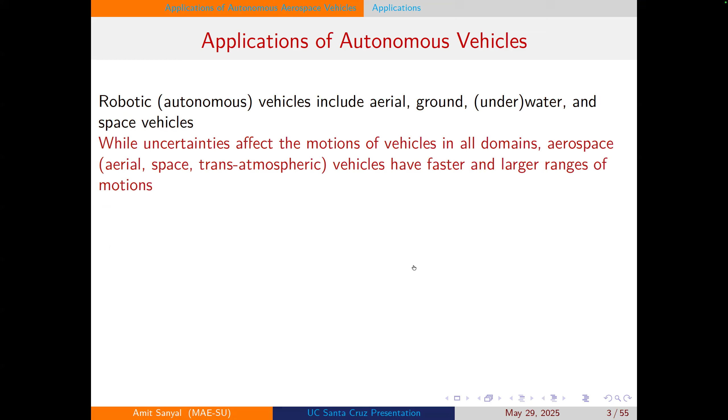So in terms of the applications, we know that robotic or autonomous vehicles include aerial, ground, water and underwater, surface water and underwater, and space vehicles. And model-based control has been around for a long time, and they work very well in many cases.

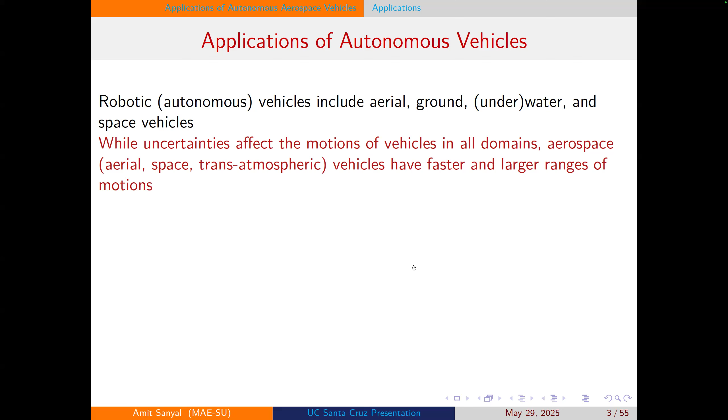But over the last decade, at least, we know that uncertainties, as our systems have become more complex and we are looking at different real-world situations and uncertainties in all domains, we have vehicles that are faster, larger ranges of motion. So we need to be cognizant of all these uncertainties and then come up with control and estimation, motion control estimation schemes that are robust to these uncertainties.

So applications, of course, we have several domains and several application domains, meaning aerial vehicles, space vehicles, trans-atmospheric vehicles, although I'm not going to talk much about the third category. And there are wide-ranging applications like exploration, transportation, infrastructure inspection, remote sensing, security, etc.

So there are, of course, increasing requirements for autonomy in these applications. And actually, I just mentioned these applications. There are more details that I have been working on. For example, on the exploration aspect that I'll mention, on remote sensing, for example, for natural disasters like wildland fires, which I'm involved in current projects in.

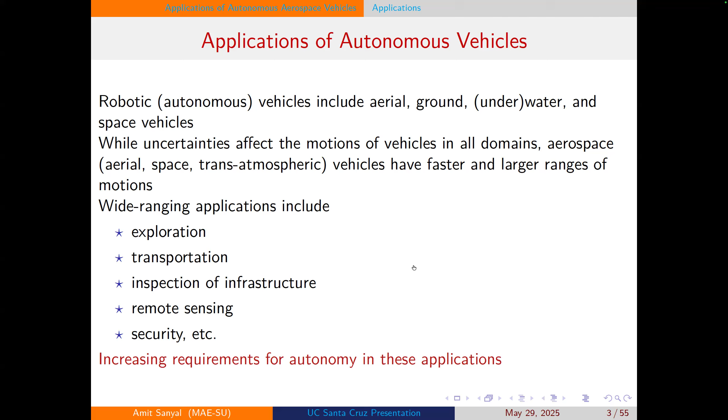So these are things that there are different sorts of uncertainties, and we require safe autonomous operations in these situations. So this is just to mention that these include search, rescue, and transportation. And then you have grand challenges, which are like exploration, engineering tools of scientific discovery, urban infrastructure, security aspects where autonomous vehicles can be a game-changing technology.

And of course, we have had these for some time, but with the recent advent of different kinds of machine learning or deep reinforcement learning schemes, etc., which I don't really get into much. I have had tangential use of those and experience with those, but I stick to the more fundamental, system-theoretic aspects of stability and robustness in whatever schemes that I describe here and in my research in general.

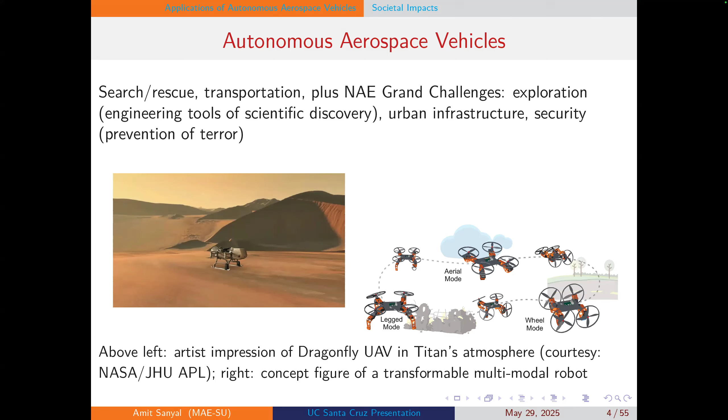Coming to the technical challenges for aerospace vehicles, we have guidance, navigation, and control. That's how aerospace engineers refer to the process of path planning, the process of motion estimation and mapping, and then the process of feedback control.

These aspects, in particular the navigation and control aspects, need to be really stable and robust to uncertainties. And of course, the last two are usually done in real time. Even guidance can be done in real time, sometimes it is not, but in all cases you're operating the vehicle in real time. So real time uncertainty estimation, control, robustness, and stability properties are very important.

Now, the challenges that I've listed here are uncertainties in the dynamics, sensor noise, and constraints. These include onboard power, processor, and sensor constraints, which affect control and navigation in the first two bullet points listed here, and then under-actuation and actuator constraints, which affect the guidance and control aspects.

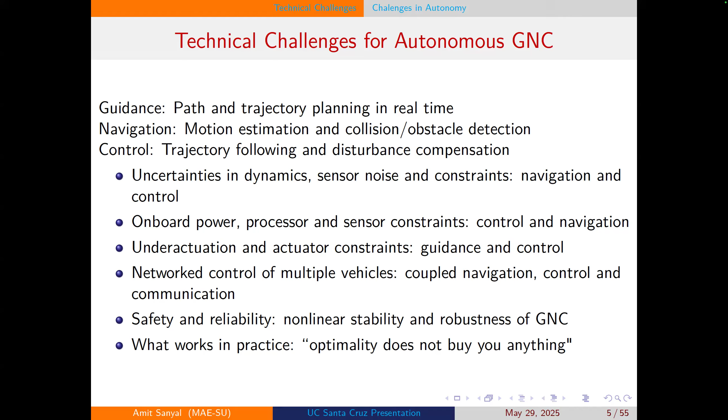So in aerospace vehicles, the first thing that I teach my graduate students, postdocs, and those who work with me is that the dynamics evolves on a nonlinear state space, in particular a manifold. That's where geometric mechanics comes in, and related to that, geometric estimation and control schemes.

You have 6 degrees of freedom for a rigid body vehicle, and you might have internal or shape degrees of freedom as well, which would be additional. So there are 3 degrees for translational motion, 3 DOF for rotational or attitude motion, and then internal or shape DOF due to actuators and power.

This includes power units that are moving as well, attached to your vehicle, like electrodynamic tethering or tethers that also generate power in spacecraft by interaction with the geomagnetic field. Flexible structures also contribute to internal degrees of freedom, and these motions are assumed to be uncoupled or only weakly coupled in a lot of control schemes.

So that's how I have displayed this in these blocks. You have an attitude dynamics model, attitude state estimation, and then feedback control, with limited or no coupling with the translational dynamics, and then the translational state estimation and control of translational maneuvers.

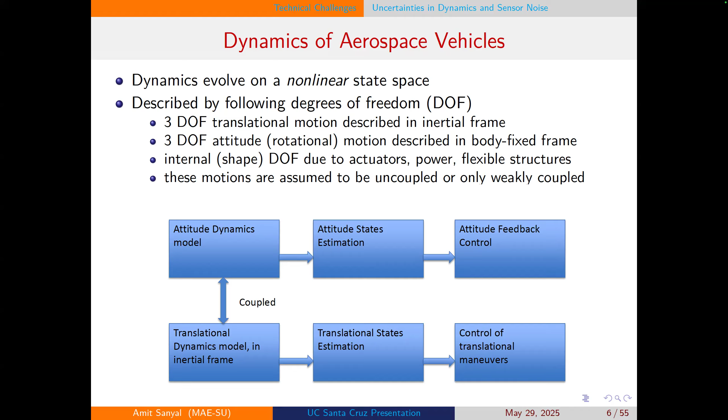So the coupling does exist due to gravity, non-conservative effects, control forces and torques from body-fixed actuators, and internal degrees of freedom. Internal degrees of freedom is what I don't talk about much here. Interestingly, that's what I worked on primarily, using internal degrees of freedom, during my PhD research a long time back.

That is actually even more complicated in terms of the dynamics. After that, I found that people are still finding it difficult to deal with rigid body vehicles and multiple rigid body vehicles, so that's what I mainly focus on now. But internal degrees of freedom do play an important role in coupling attitude and translational dynamics, and that could be even flexible due to flexibility of the structure.

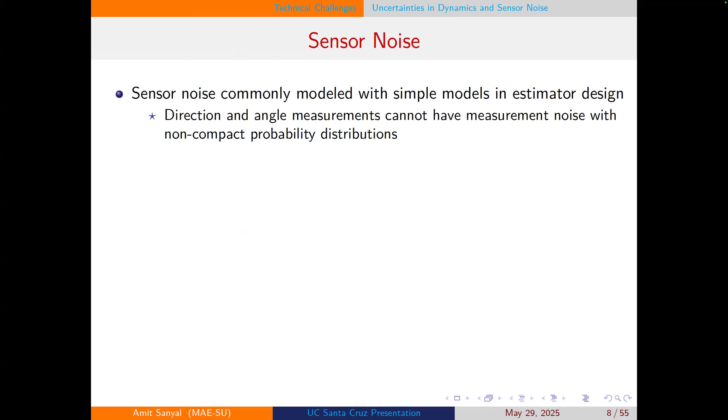Sorry, I think I went forward too quickly. So the effects of coupling due to these different influences are often not known precisely. And if you assume that it's uncoupled, then it'll not be robust to these effects.

In some cases, when the energy in the translational motion is much larger than rotational energy, the uncoupled approach works one way, in the sense that the translational motion affects the attitude motion, but not the other way, because the translational motion has so much more energy than rotational motion.

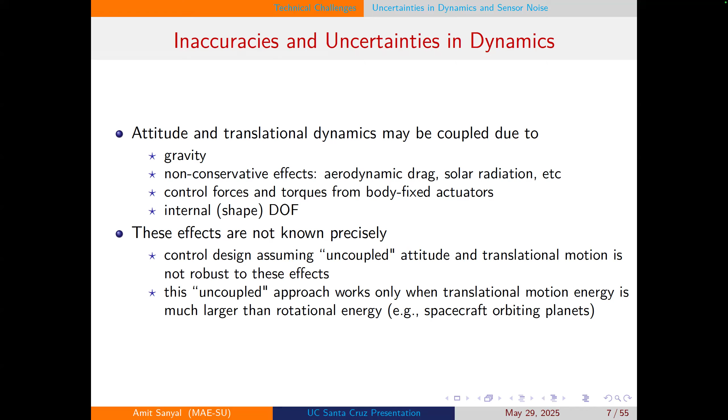So talking about sensor noise, that's another thing where we usually use simple models in estimator design. You can create an optimal, quote unquote, estimation scheme based on these simple models, like extended Kalman filter, for example.

However, that's not going to be robust, and the EKF is known to be even unstable, or it lacks guaranteed stability, let's put it that way. So you are not guaranteed that you'll have stable convergence.

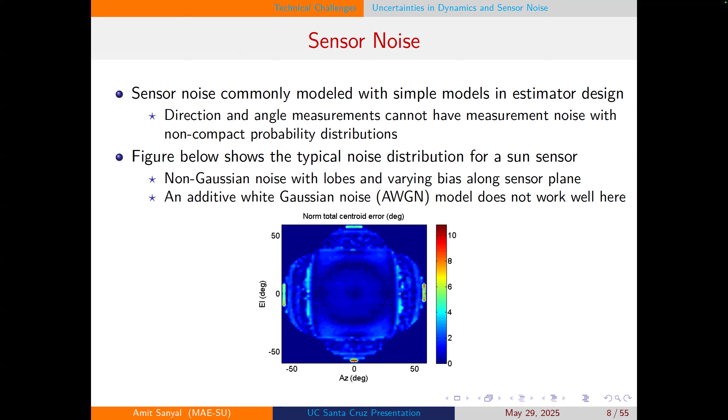So in my research, I have primarily used deterministic methods because they're more robust, and I don't care about optimality, as I mentioned earlier. Deterministic works very well. What works in practice is, and I tell my students this, that it's good theory that leads to good practice. So what works in practice, why change it?

And of course, we have constraints on power, onboard processors and sensors, although these are becoming better and better year to year. We can see that some of these sensors nowadays have inbuilt schemes based on CNNs that can detect obstacles in real time and move out of the way.

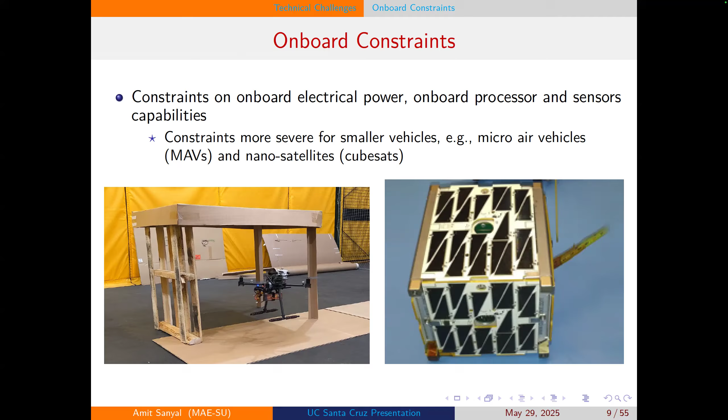That's actually the perception problem, which I think is where computer vision has made a lot of progress, but I'm not going to really focus on that. It's something that I have used and continue to use, and there are some useful aspects, although I don't rely on it entirely in the feedback loop, because there are problems with those perception schemes.

So in terms of underactuation, I'll just go over this quickly. As I mentioned before, for most aerospace vehicles you actually have body-fixed sensors or actuators, and these can give you three degrees of control of the rotational motion, but usually just one translational degree of freedom is directly controlled. So that is underactuated, but it's known that we can go from point A to point B. Path planning is possible with that kind of actuation.

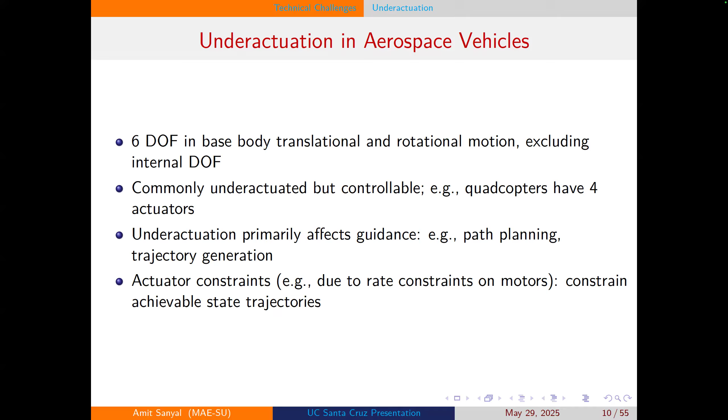More importantly, there are actuator constraints that can restrict achievable state trajectories. These are things that, if you factor in during the design, are better than trying to redesign or change your design on the fly after you have designed a control or estimation scheme.

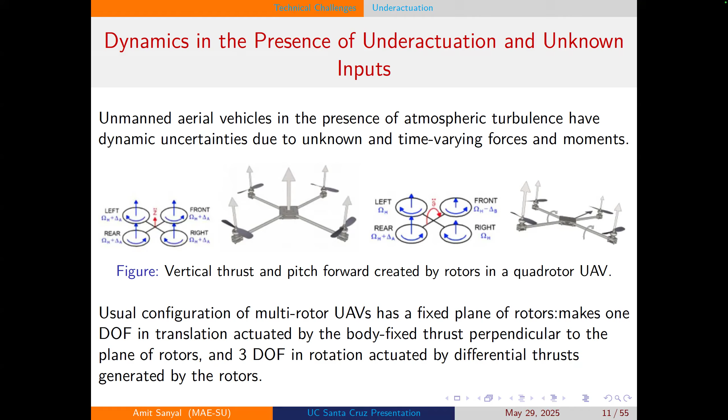So I'm depicting quadrotor UAVs here, rotorcraft unmanned aerial vehicles. Here I talk about dynamic uncertainties due to external environmental conditions like atmospheric turbulence. In this case, we have actually found that active disturbance rejection control, using some of our geometric control schemes and estimation schemes, works very well. I'll talk about that later.

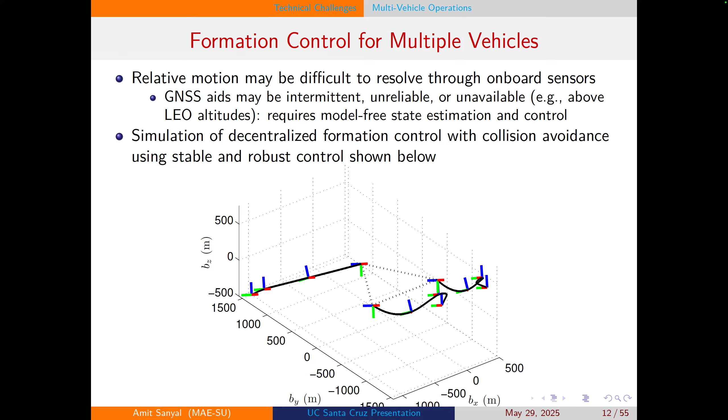So these are the initial configurations, relative configurations, and then they come around to form a triangle formation, as shown here. I don't go into the details of the schemes, but that's something that we have done in the past.

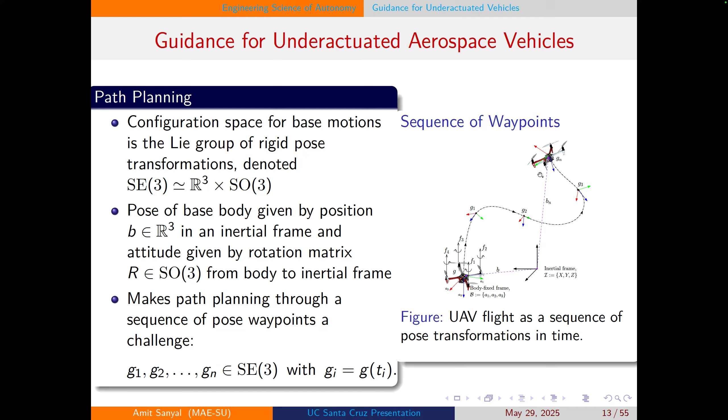So getting into the path planning problem, this is a situation where we have guidance for a vehicle like a quadrotor UAV with a fixed thrust direction, and we have 3 rotational degrees of freedom controlled directly with the 4 thrusters. You can generate a sequence of waypoints as shown here in an inertial frame. I denote these waypoints by G1, G2, G3, to denote that they encapsulate both the position of the base body and the orientation. So G is basically the pose, taking into account both position and orientation. We specify some waypoints in pose, and then we have a motion planning scheme to execute that.

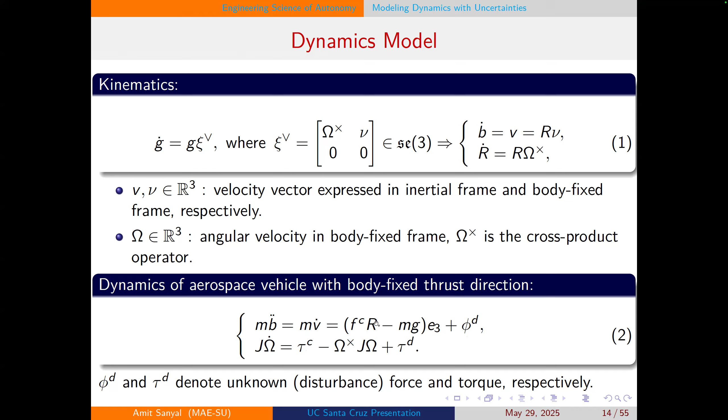And with this, we can actually generate a trajectory given some waypoints. This was part of a project we did 7 or 8 years ago, maybe 2018 to 2020. It ended around 2020, just around the time COVID hit. This was an interesting situation - we actually did not fly it outdoors.

The waypoints were designed using a reinforcement learning scheme, but it was outside the loop, because it took a lot of time to do that - I would definitely not put it inside the loop. Once the position waypoints were generated, we then generated a position trajectory using nothing but LQR, and the LQR model was basically a fourth order integrator model.

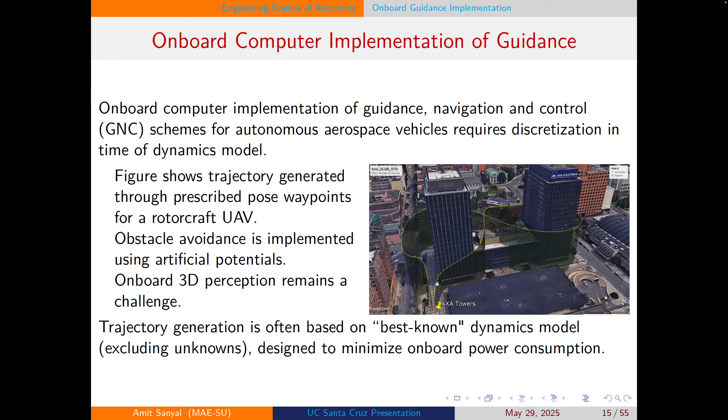We then generate the trajectory. It's based on a best known dynamics model, but the control scheme takes care of disturbance rejection. So we have trajectory generation, then motion estimation, and then the feedback control scheme - that completes the entire loop.

The trajectory planning, as we found, can be done onboard, and we use learning algorithms to generate 3D waypoints and trajectories. But for real-time onboard implementation, we put that outside the loop, and then use sensors to go through those generated waypoints using GPS for outdoor flight.

We didn't actually test it in that area, and at that time we were warned by the police, so we settled on an area where we got permission to do this in a field, generating this trajectory and waypoints. This was done, and we also later did this in simulation, not in the actual outdoor flight. In simulation, we also added a pointing direction constraint, and that was interesting.

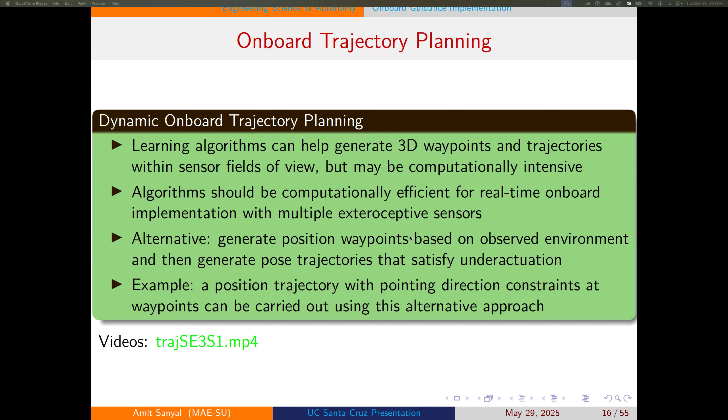Let's see if this works. If I have time, I'll share this trajectory generation - I think I have more videos, but I may not have time to go over those.

So this is the situation where this goes through those waypoints, and you'll see that the red line, or red axis, aligns with the direction that we want it to point.

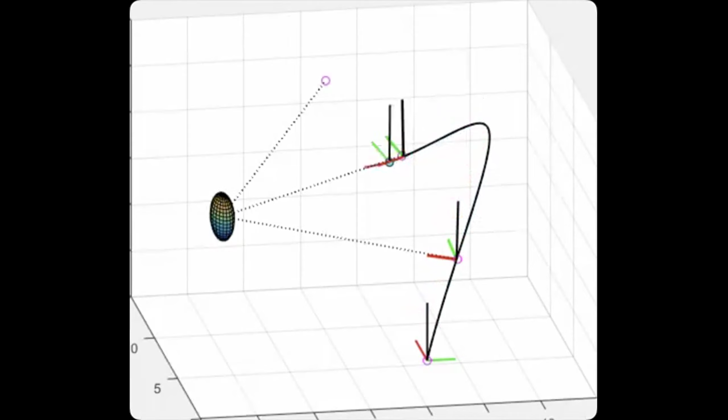And curiously, it makes these S-shaped curves. That's actually the position trajectory generated by the LQR. And it ends at each location, you'll see that the pointing direction is satisfied.

So going back to my presentation, so this, okay, now I'm going to switch gears and talk about motion estimation.

For motion estimation, for attitude estimation, it turned out to be quite easy and very easily implementable in hardware. Translating from theory to practice was easy. We came up with this interesting relation between what is known as Wahba's problem in attitude determination, which has been around since the space age started.

And then we generalized it to a Lagrangian, using an artificial kinetic energy-like term and artificial potential energy term. We found that Wahba's problem, the minimizing of this residual, actually leads to a Morse function, a polar Morse function.

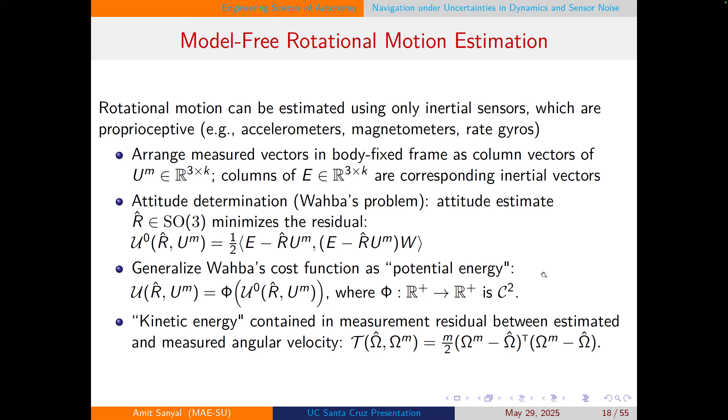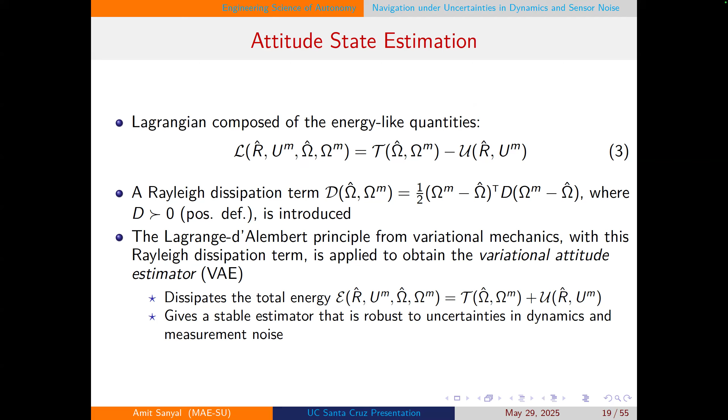And then we have a Lagrangian composed of that. If we introduce an additional Rayleigh dissipation term and apply the Lagrange D'Alembert principle, then we end up getting what I call the variational attitude estimation scheme. This is going to give you a stable estimation scheme that is robust to uncertainties in the dynamics and measurement noise, because it's actually model independent. So it's a data-driven estimation scheme - it does not depend on the model because you do not know what the dynamics model is, or what the inertia parameters are, like the mass of the body, etc.

So this can be discretized using the discrete Lagrange D'Alembert principle. This is discrete geometric mechanics. I won't go into the details again, just giving a very high level description here.

And we compared this with, at that time, some schemes that are still kind of used. This is a filtering scheme from 2013 called the GAME filter, geometric approximate minimum energy. This is like a second order scheme - the extended Kalman filter is first order, so this is kind of a second order Kalman filter. It's based on work done in the 1960s by a person at UCLA, trying to get higher order optimal estimation schemes for nonlinear systems by generalizing the Kalman filtering formulation. Then we compared it with the MEKF, the multiplicative extended Kalman filter, and this constant gain observer.

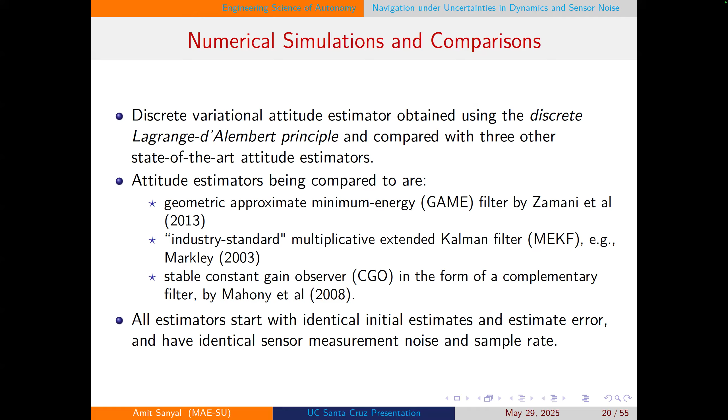All estimators we simulated, and then we also implemented on a smartphone. All estimators start with identical initial estimates, estimation error, identical sensor measurement noise, and sample rate. This was interesting - it was actually reported in ICRA in 2015.

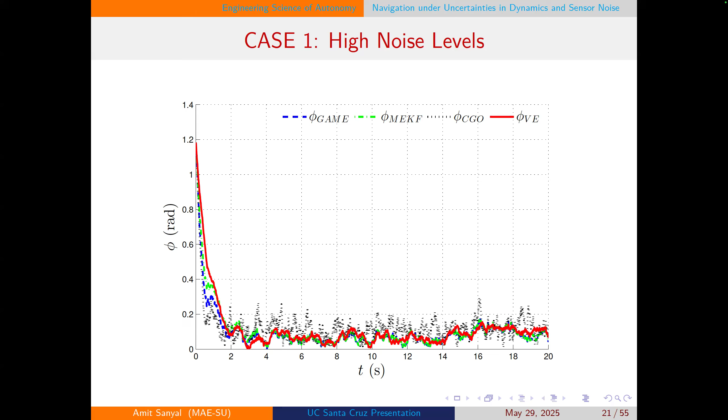However, if I do not change the filter gains, and now I have a better sensor, my noise levels are now less. What happens is interesting.

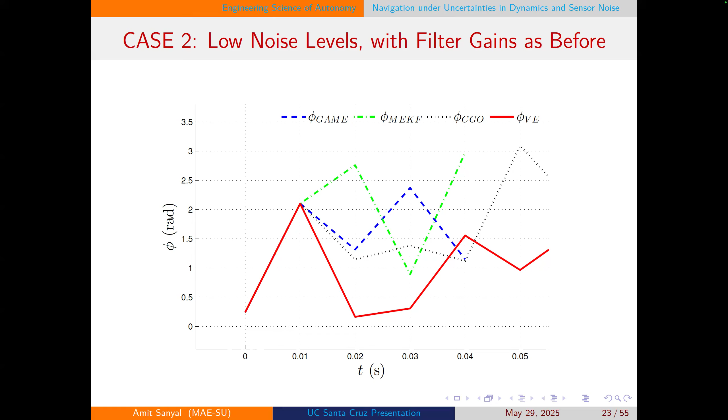So that's expected. It was kind of counterintuitive at first, but then we realized that actually if the sensor is better than what was thought when you designed it, and that's where optimality, as I say, is only with respect to whatever index and whatever assumptions you made. So if those assumptions are wrong, then you can have unstable behavior.

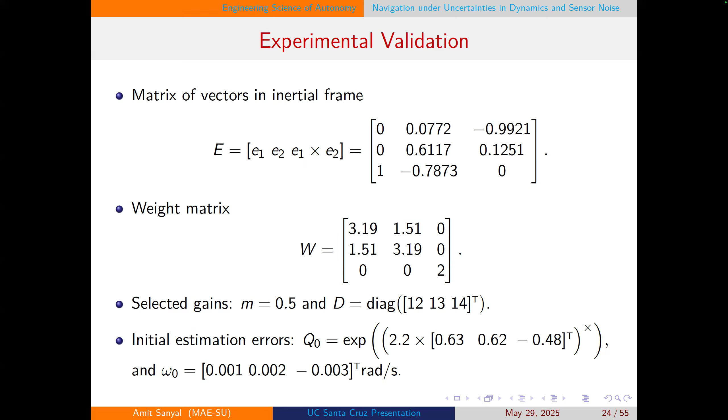So near optimality is what you get with these kinds of filters, and near optimal does not guarantee stability. Experimentally, we validated this also using, at that time, 2014, I don't know if this is going to work or not, but this was actually...

So in summary, it worked out without needing to be retuned. Every time you change sensor does not mean that you need to retune. It'll throw the estimation scheme off a little. It'll have transients, as we saw, but it's still going to converge.

And then we extended this. We made a finite time stable version of this, which was continuous, uniformly continuous. We use Holder continuous finite time stable schemes, which are actually implementable, and they're uniformly continuous. They're not like sliding mode type observers or control schemes.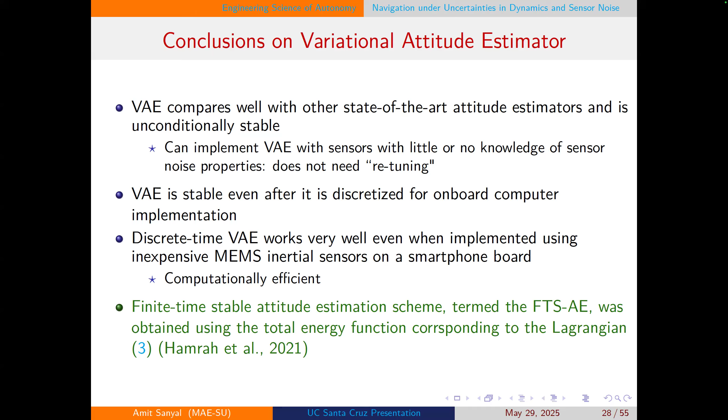It works out very well. We found that in 2014, 2015. However, pose estimation is a whole different ballgame, and we are only now realizing it. Our pose estimation schemes—I'm just going to go over this fast in the time given, so I know that I'm behind—this is actually using the same sort of idea.

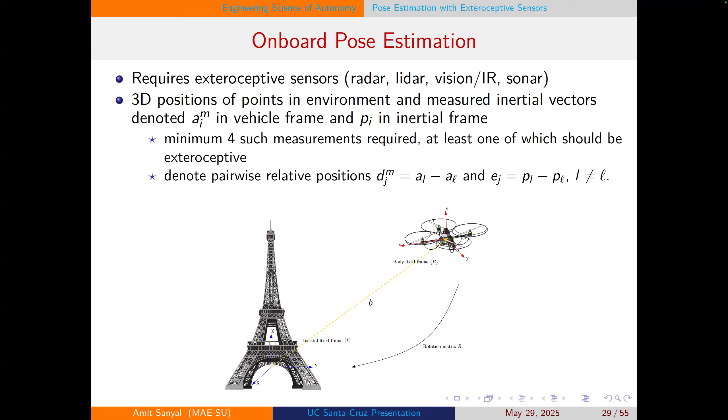Here now for pose estimation, you have point clouds. These could be from LiDAR or depth cameras. It could even come from sonar or radar. But point clouds are then used to find centroids for the point clouds.

And then assuming that you have perfect measurements, this is how the centroid of the point cloud that you have in the inertial frame and the point cloud that you measure in the sensor frame are related. R is the rotation, B is the translation of the sensor with respect to an inertial frame.

So at least one 3D point needs to be measured to estimate the position, and you need 3 others to estimate the orientation, but those could be direction measurements. So for measurements, we can have some linear filtering to remove noise from the sensor frame. And then we relate the vehicle translational and rotational velocities to these measurements without actually directly measuring them.

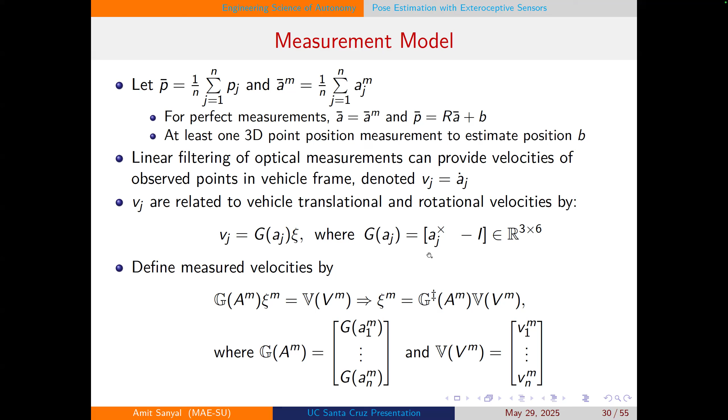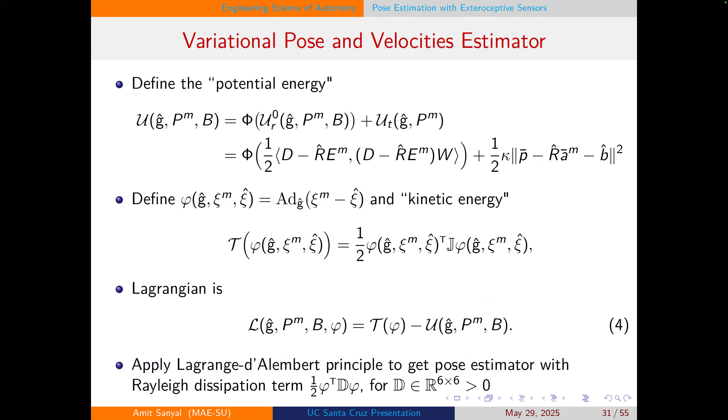And this was interesting. So again, we create the potential energy and kinetic energy, a Lagrangian from that. We apply the Lagrange-D'Alembert principle, and we get numerical simulations.

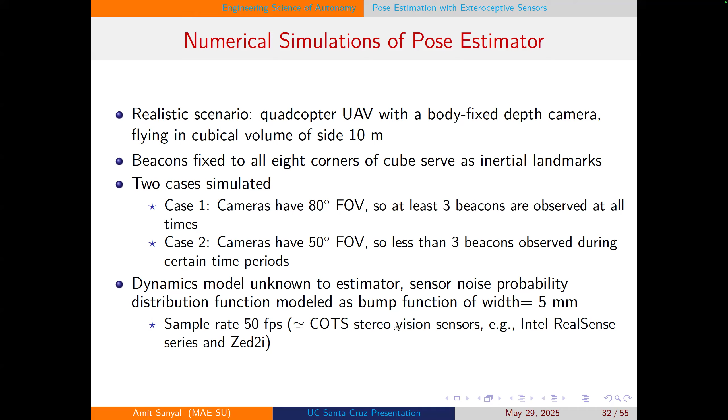And then we also implemented this using two types of sensors: the Intel RealSense series sensor, which also has active depth detection, and the Zed2i sensor, which is a depth camera. So we are still using it.

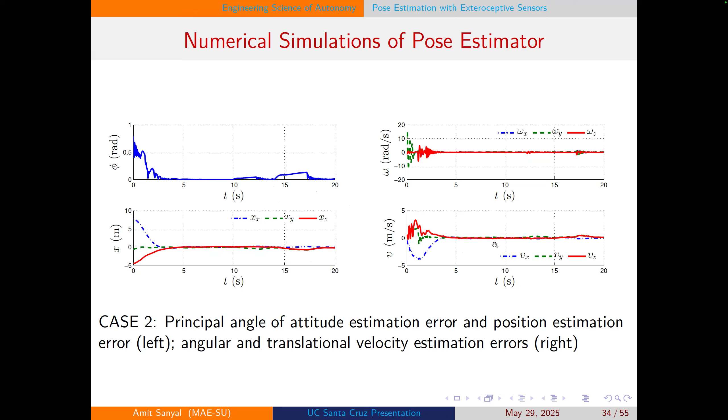So one disadvantage. The advantages are it does not require a dynamics model, can be implemented in poorly known environments, can be implemented with commercial off-the-shelf sensors with low power requirements, and can be used to estimate relative motion states also between multiple vehicles. And it is robust and stable.

Disadvantage is it does not really predict error margins or bounds on velocity estimates, because we are actually estimating the velocity indirectly from the points measured, unless it's coupled with model-based observers. And there is a recent work under review which extends this to finite time stable pose estimation, which is more robust to sensor noise and dynamic uncertainties.

And this can be used in even underwater vehicles, though those would probably need sonar, but definitely for UAVs and spacecraft.

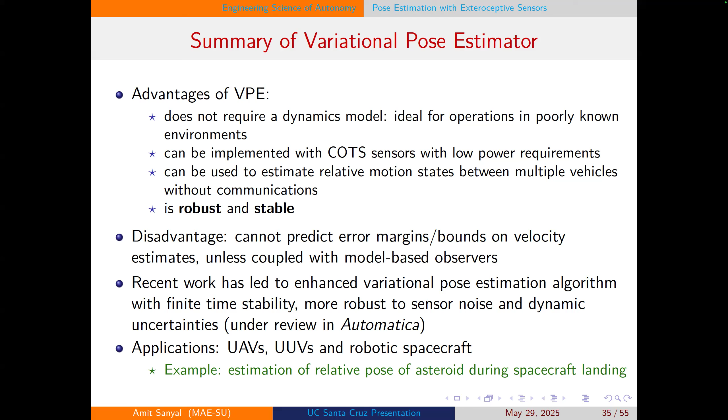Now I'm going to go into the robustness aspect with our schemes for active disturbance rejection control, which use disturbance observers or extended state observers. In the dynamics equation for the rigid body vehicle, we have the disturbance force and disturbance torque, and this is what we are trying to estimate without directly measuring them. We have states that we measure, or in the case of point cloud measurements, they are external measurements that we translate to state estimates. This process is known as active disturbance rejection control.

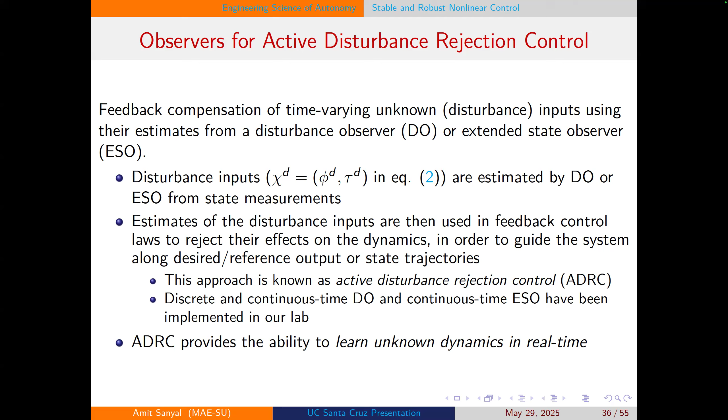As some of you may be aware, this has been around in the robust control community for some time. We obtained both discrete and continuous time disturbance observers, and continuous time extended state observers, and this provides the ability to learn unknown dynamics in real time.

In this scenario, we actually design a disturbance observer of this form, starting with an initial estimate. This function could be one that gives you asymptotic convergence, or one that gives you Holder continuous finite time stable convergence, and you can design it to ensure some ultimate bound on the disturbance estimation error.

So you can have a set tolerance, and this requires one caveat: knowledge of bounds on the rate of change of the disturbance inputs. Interestingly, if the disturbance input is constant, we estimate it perfectly. But if we have a dynamic disturbance input which changes with time, then the bound we settle into would depend on how fast it changes.

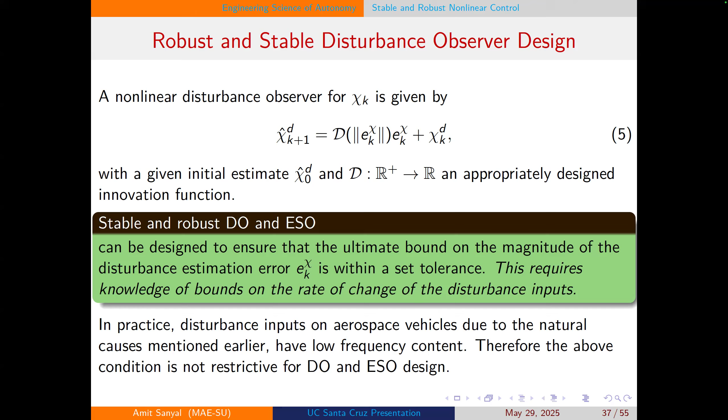Usually disturbance inputs have low frequency content in real life, so we are saved by that, and it's not really restrictive for the type of disturbance and extended state observers that we designed.

The interesting thing I'd like to point out is that these disturbance observers can be used to design a stable data-driven control scheme. It could be a black box entirely, or more generally a gray box, because for robotic vehicles you usually have some physics-based model very well known, and then you have the uncertainties. So it could be used in practice and in theory for a complete black box, though that actually has not been done in practice, but in theory we have shown that.

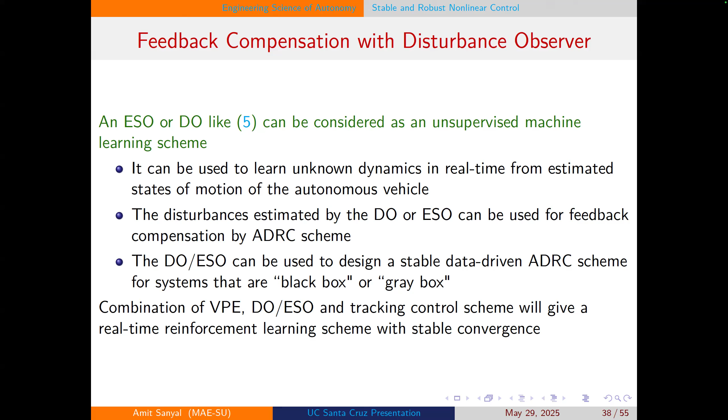In practice, we tested it on a quadrotor UAV in front of a fan array wind tunnel that threw three-dimensional turbulent airflow at the UAV.

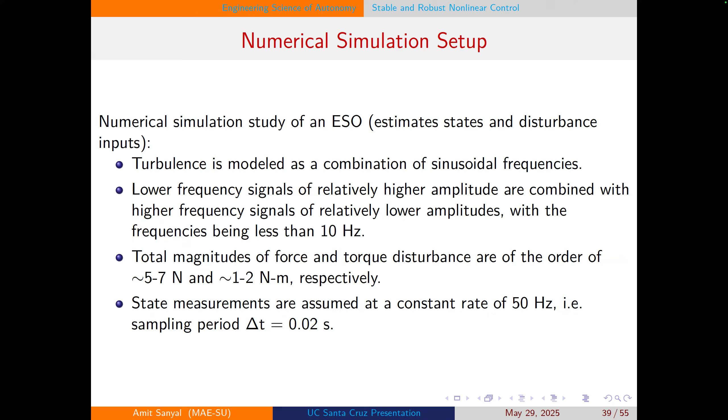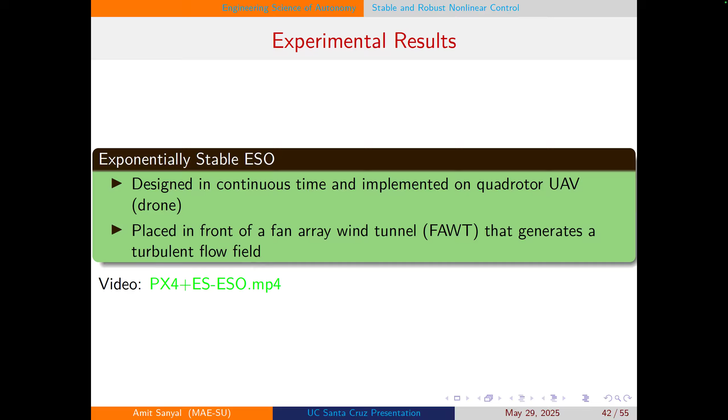And then we have some experimental results here, and I'm just going to play this. I know that somehow my embedded video in the LaTeX Beamer is not working, so I'll switch again to play this video.

Let me switch back. So what I wanted to mention here is that you saw it was on a harness, because we don't want it to fall and break apart when we hit it with the turbulence.

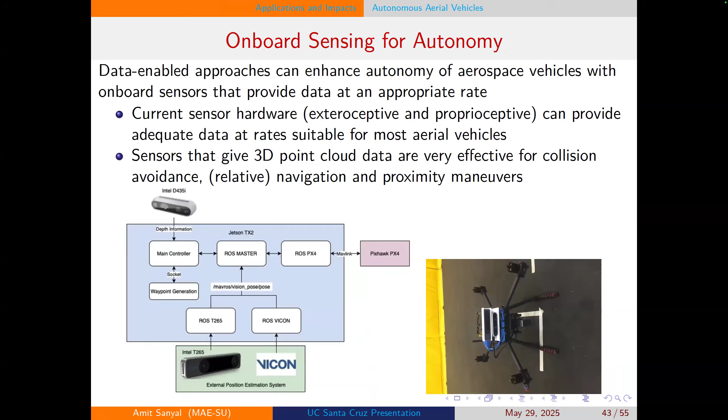So this is actually where we have our 3D pose estimation scheme. We have a version of it that's in a patent, but this is...

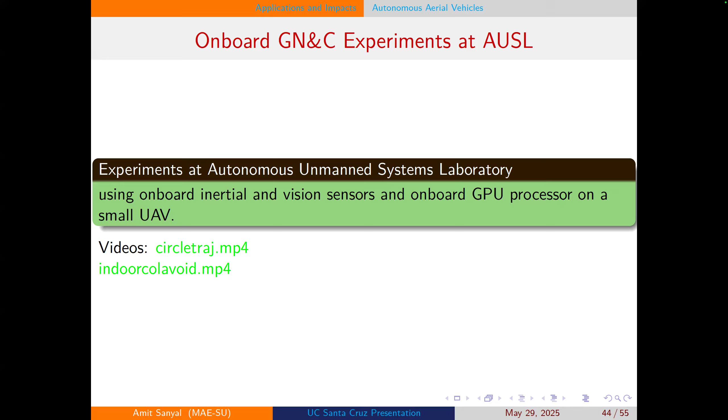Let me just switch again to this video where we...

We actually implemented this using GPU and the Intel sensor first, and then we implemented it using the depth camera sensor. So we have a version now with the depth camera sensor.

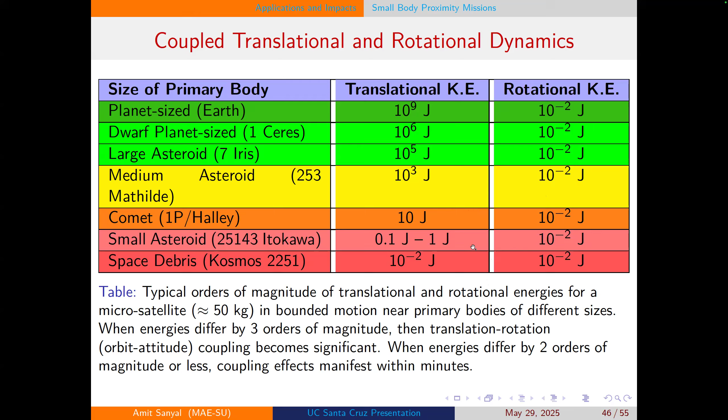So for small body missions, we found that if we have a point mass trajectory that goes this way, and even with a very basic ellipsoidal model of an asteroid the size of Itokawa, a small asteroid, we find that there is significant difference because of the coupling, or maybe you can call it a disturbance in the translational trajectory induced by the rotational motion.

So even if you did not have any initial angular velocities to start with, just because of gravity, there is some gravity gradient torque on the body, unless it's a perfect sphere with spherically distributed mass.

And in that case, you'll find that the coupling itself induces this rotational motion, and the trajectories are very different. So one is not impacting, the other is actually impacting the surface of this body. The initial translational speed that we started with is 5% more than circular speed at a certain altitude. This is approximately the rotation period for Itokawa, which is a uniformly rotating body with constant major axis rotation.

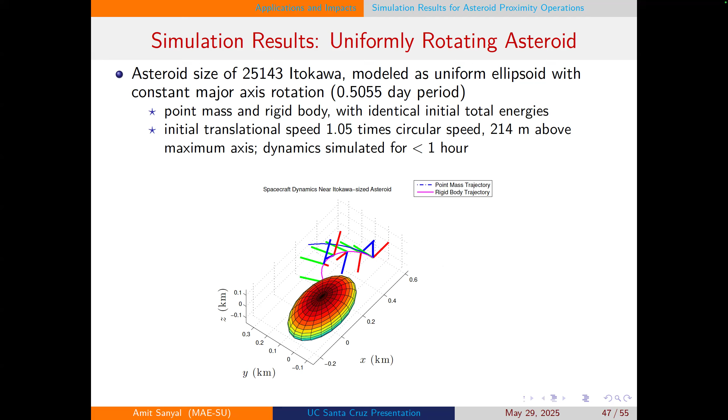And actually, for tumbling bodies, that's even worse. I think I skipped a slide here. So yeah, this is for Bennu.

And we see that for Bennu, it was theorized that solar radiation pressure could stabilize an orbit, called the terminator frozen orbit. But this was with a point mass model. When we include the rigid body effects and gravitational orbit-attitude coupling -- a term coined later by these authors in 2019 -- we find that solar radiation can actually strip the spacecraft away from the body, and you can see that it's moving away.

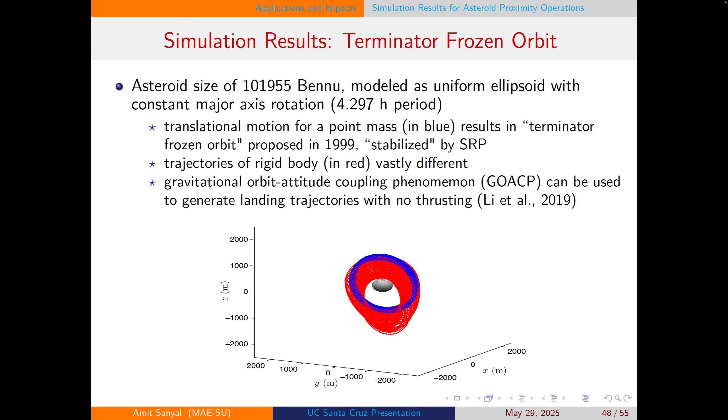What was interesting is that we also generated landing trajectories with no thrusting. This was done with a visiting scholar that I had, who did a large part of the work. This was pre-COVID, published in 2019. This was a visiting scholar from China who I worked with. He generated a lot of good results using our models and the gravitational orbit-attitude coupling phenomena. So this was some work that we did then.

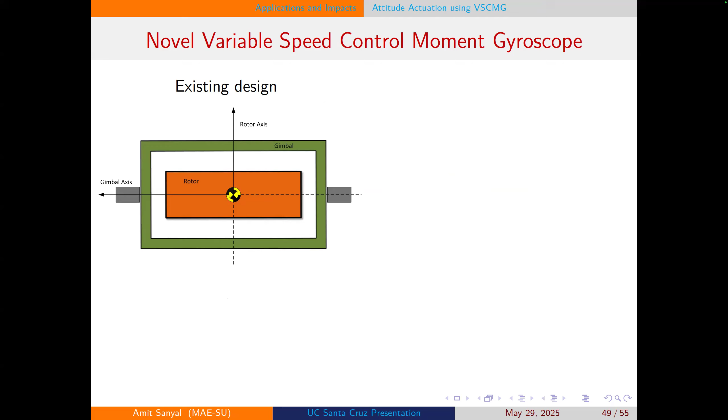I think I'm not doing very well on time right now. So I'll just skip this part.

So this is actually a novel variable speed control moment gyroscope design. I'm switching between topics randomly, I know, but this is just an interesting dynamics problem again, where we designed variable speed control moment gyroscopes. Now these are attitude actuators used in spacecraft.

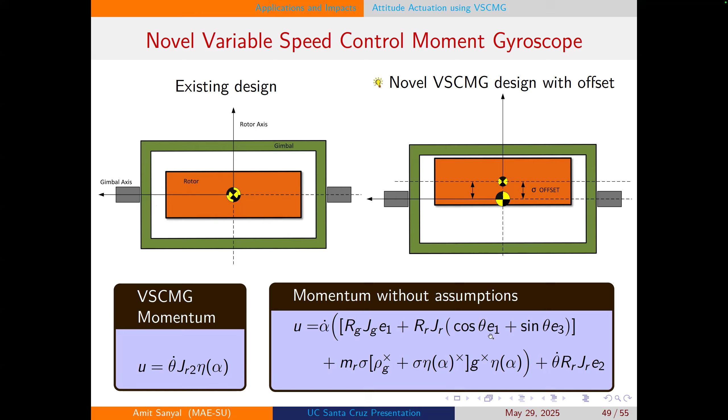Normal design is this, where you have a gimbal axis and a rotor, and the rotor's centerline coincides with the gimbal axis. Here, we deliberately introduced an offset, and the dynamics is much more complex, but then you actually get some additional control authority.

This has a lot of applications, but we have not really explored all of those applications, although we have a patent on this design. It's probably the smallest control moment gyroscope that we have come up with, or anybody has come up with, in fact, because as you see, it fits in the palm of a hand.

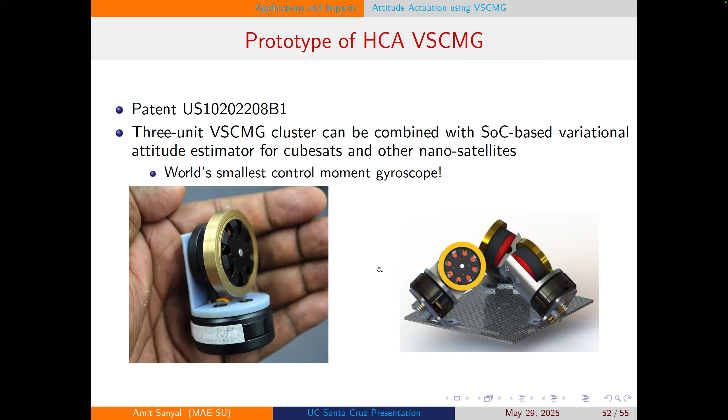The student who worked with me on this particular design started the company that was mentioned, Akrobotix. I was just a minor player in that. He now has a different base. I'm not associated with that company anymore, but he makes autonomous snow removal robots, calls it Snowbotics. So it's still in existence, but I'm not associated with it anymore.

Anyways, just to quickly end my talk, I think I have a few more slides. So this is what I see as outstanding challenges in autonomy for aerospace vehicles, in general vehicles, robotic vehicles. It could also be underwater or surface water or ground vehicles.

Guaranteeing stable convergence with onboard constraints. Perception still remains a problem, although we are looking at a case where we have now onboard really computationally efficient pose estimation schemes. They're not SLAM schemes, they're not mapping the environment, but they at least let the vehicle know where it is in relation to the surrounding 3D environment, which is important, especially for collision avoidance.

And guaranteeing robustness of navigation and feedback control schemes to unknown or unmodeled inputs, which we have handled, I think, very well. Now, humans in the autonomy loop is something that others are working at.

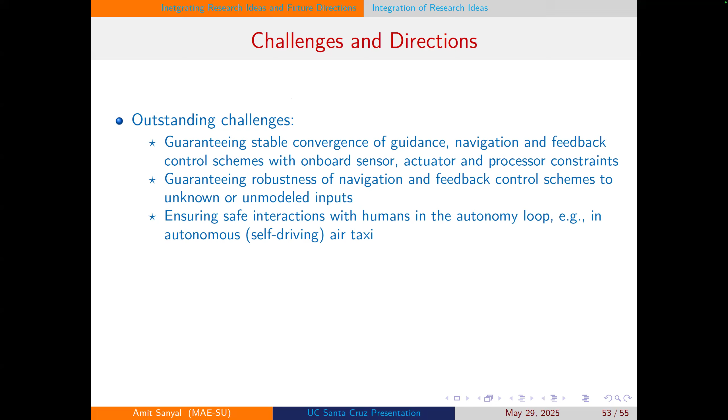I'm very tangentially aware of that. I have a person who wants to use my lab. He's one of our former students who has a project with the Air Force, I believe. He started his own small company, an STTR project that uses LLMs to command drones. So as long as that is outside my feedback loop, my navigation and control loop, I'm happy with that. Inside the loop, I'll be very worried. So that's how I'm tangentially associated with that.

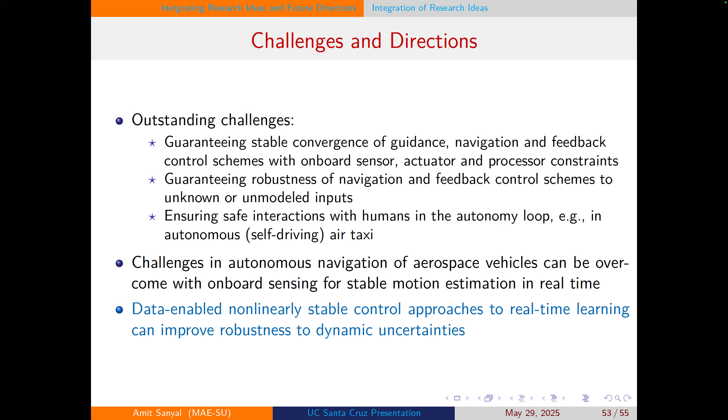But I believe that we have overcome many of the constraints for stable motion estimation in real time. It's still a challenge, but it's actually the most pressing challenge. The data-enabled control approaches, real-time learning, robust control, those I think are more doable, and we have done that. It took a long time for us to actually get the pose estimation working.

Translating research to practice, of course, building collaborative ties, this is always easier said than done. I try to, as I tell my students, it's good theory that leads to good practice, but I'm not the type of person who is very well connected. And sometimes when I talk to people about geometric mechanics and geometric control and estimation, they probably think that this is too theoretical to be of any use in practice.

Which is why actually I had a visitor from Cambridge today earlier in my lab, and he was talking about how they use LLMs for multiple ground robots and commanding them. He was showing his work there. And then he remarked about how these schemes were very efficient, rejecting disturbances using neural networks.

At the end, we got around to discussing, and he said that they have real world problems where in the real world, there are logistics problems like in warehouses where they don't care about optimality. And he was told that when he went to demonstrate his robots in a warehouse where they are using autonomous robots for grocery picking, apparently, in a place in England, some company in the UK does that for your grocery. Instead of you going to the grocery, these warehouse stores all the grocery items and the robots do the picking. If you order online, it gets put into a cart, packaged, and sent to you. So that was interesting.

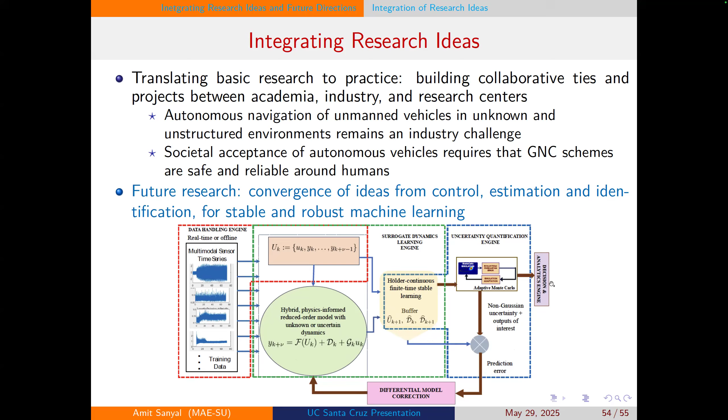And then that gets into this differential model, and then that gets fed back to improve our model here, especially the D. And so we learn about the system over time. So this is like a digital twin concept.

So with that, I come to my last slide. I know that I'm about 10 minutes over the limit, but I just have this one more.